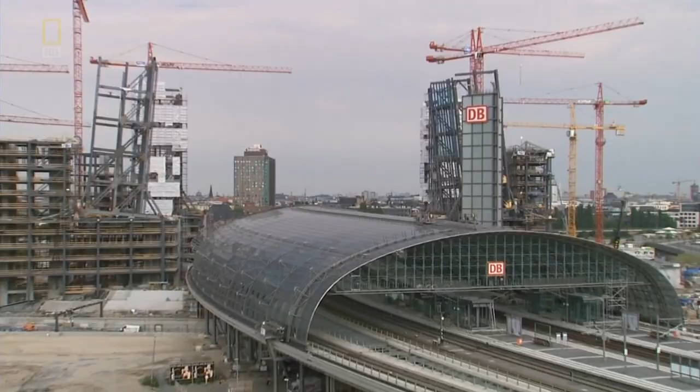Berlin, Germany. A construction team races to finish the largest train station in Europe before next summer's World Cup comes to town. To meet this deadline, 2 massive steel towers must be tipped over their new glass station in under 3 days. It's an engineering feat never before attempted. Can this team of engineers get this daring plan to work?

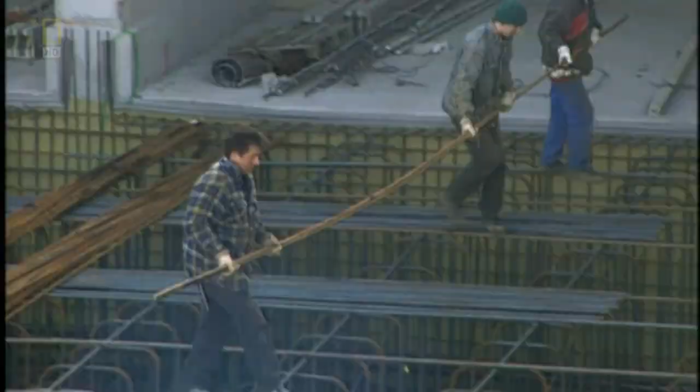In Germany, builders are racing to complete an architectural crown jewel. They've labored for over a decade, confronting one disaster after another. When finished, this will be the largest train station in Europe. 7 levels containing a staggering 180,000 square meters of space. Nearly as much space as the Empire State Building.

Even more amazing, 2 office buildings will straddle the station, both standing 12 stories tall, with 4-story high bridges suspended just above the glass and steel roof of the station. The price tag? Over 4 billion euros and counting. Financed by the Deutsche Bahn, the German rail company and the government, and designed by a world-famous architect, the project is intended as a bold statement. If it works, it will literally and figuratively reconnect East and West Germany, ushering in a new era of unification.

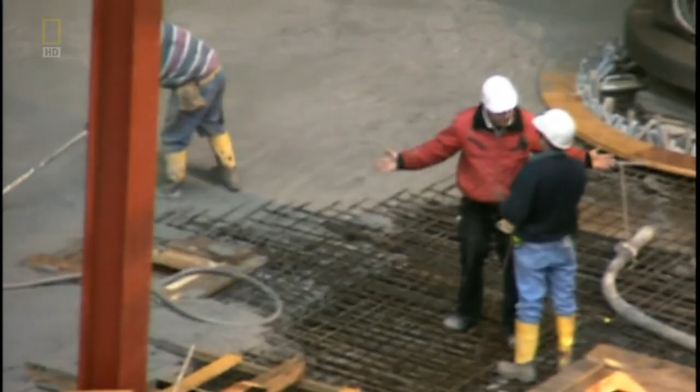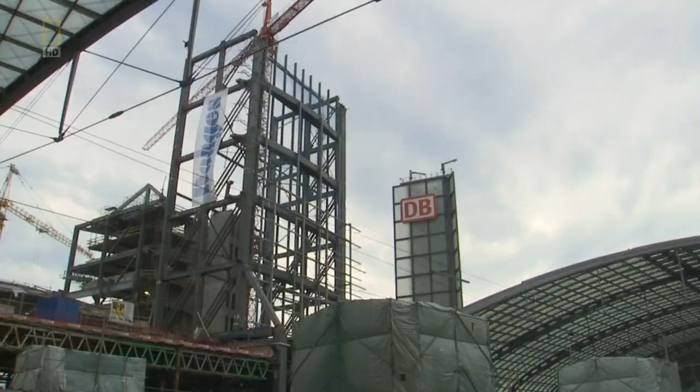But the project has faced terrible setbacks. It's years behind schedule and billions over budget. To make matters worse, the architect is suing the developers for cutting corners on his design. Soon, the project will be coming to a head. The builders are about to execute a move never before attempted in the history of construction. They will attempt to gently pivot these 2 massive halves into their final position, forming a steel bridge just 2 meters above the station roof.

It's a terribly risky scheme. If anything goes wrong and the bridge sections hit the glass roof below, the project would suffer unthinkable damage, and the cost would go up by more millions. Will Berlin's new central railway station ever be finished?

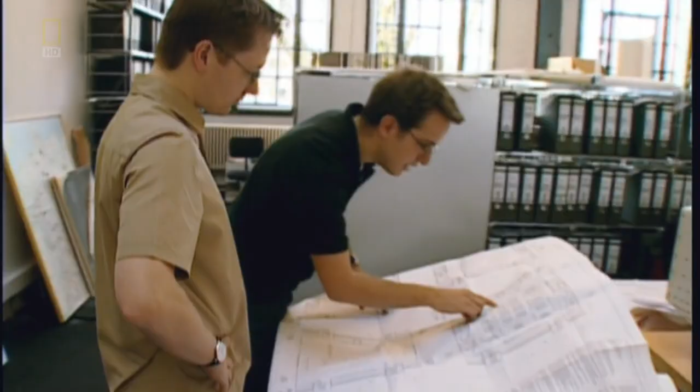Since the 1989 fall of the Berlin Wall, Germany's capital city has undergone a frenzy of rebuilding in an attempt to reclaim its historical place as the cultural and economic center of Europe. What better way to solidify that role, planners thought, than with a truly world-class rail station? As the centerpiece of a completely rebuilt transportation system, the station would not only relink East and West Germany, but all of Europe, by connecting Paris with Moscow and Stockholm with Vienna. Berlin, of course, would be at the center of it all.

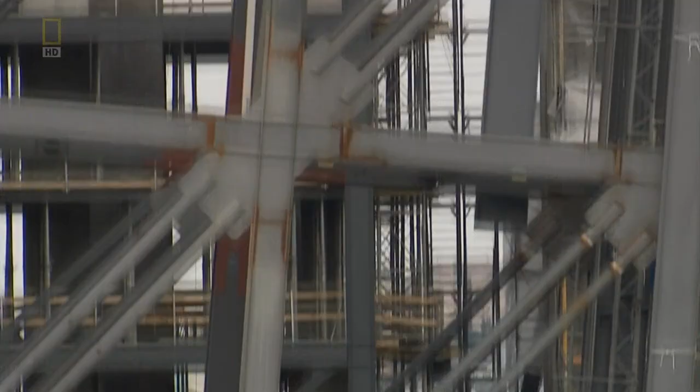But today, 5 years after its original scheduled completion date, the project is still under construction. And it's reached a critical moment. Down on the streets, crowds begin to form. They've come to watch an unfolding drama. A milestone event in the history of construction engineering. The fate of the entire project hinges on this step.

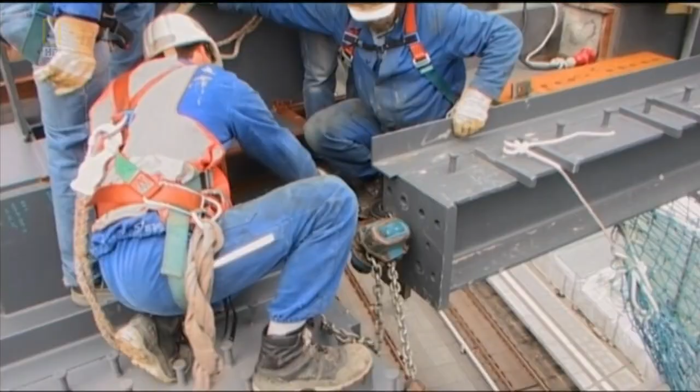Up in the air, a team of specialized engineers and workers are preparing to execute a dangerous maneuver. Scaling the steel like mountain climbers, workers make their final adjustments. Check and double-check hundreds of details. All eyes are now focused on a pair of huge steel bridge sections. When finished, they will form a bridge, 4 stories high, hovering just above the roof of the train station. The bridge will join the 2 sides of the office building and will itself contain thousands of meters of office space.

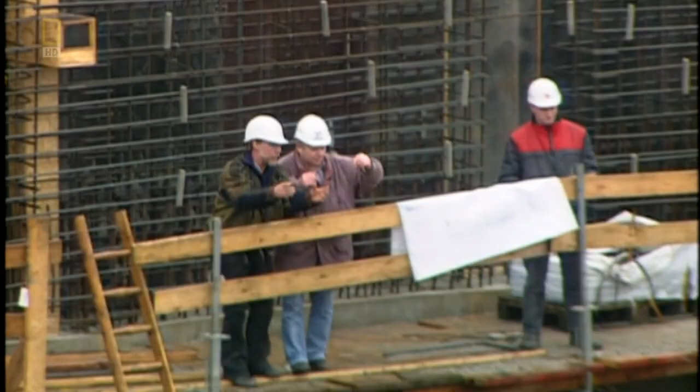Because building a working train station was the top priority for builders, the twin office towers would have to be built after trains were running through the nearly completed station. One of their original ideas called for building the bridge the usual way, starting at one side and building out horizontally over to the other. But engineers realized that building the bridges that way was too dangerous. Safety officials lay awake at night at the thought of cranes swinging these huge steel girders above their new glass-roof train station, packed with thousands of commuters. They'd be forced to shut down train services over 6 weeks until the bridge was done. But that would have brought Berlin to a standstill.

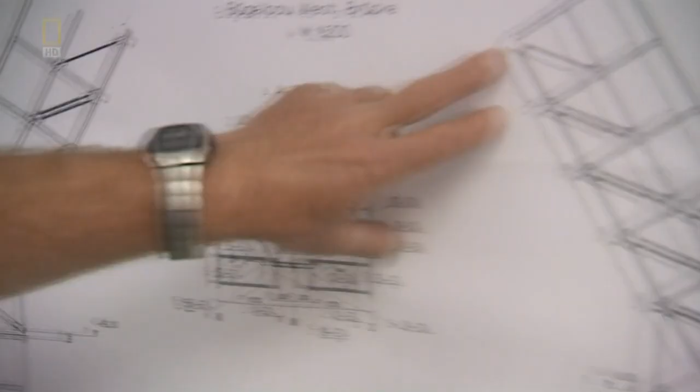So engineers came up with a remarkable solution. They would build the bridge in halves. Each half was built not out, but up. Now the 2 halves are ready to be lowered into place with cables. The tipping technique has never before been used in an urban setting. But now, there's no turning back.

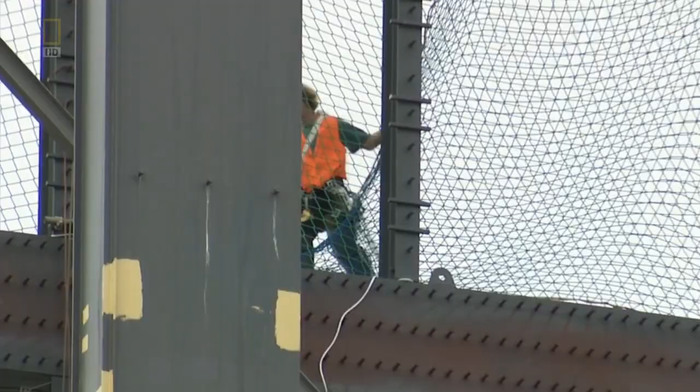Starting at 10 tonight, train services through the station will be halted. But only for the weekend. They'll have 54 short hours to get the bridge lowered and the sections attached. But each section weighs over 1,200 tons. If something goes horribly wrong, it could mean the total destruction of the station's spectacular new glass roof. It has one of the largest glass roofs in Europe.

Over 11,800 individual square panes. Each pane weighs almost 100 kilograms, bringing the total weight of the glass alone to 1.2 million kilograms. That's a lot of glass.

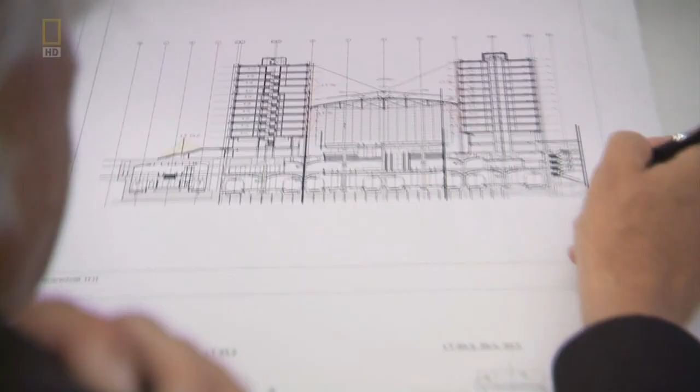World-famous architect Meinhard von Gerkan knew from the beginning that he wanted glass to play a prominent role in the station's design. The most important thing for a public building is to have the impression of daylight. You feel much better if you are part of the total environment, the natural environment.

As it happens, big glass structures are all the rage in Germany right now. When the Reichstag, the German parliament, was rebuilt in 1995, the government insisted on installing a glass dome on top to reflect the new German transparency. Glass has traditionally been a material of choice for train station designers, but it's always been expensive and tough to work with.

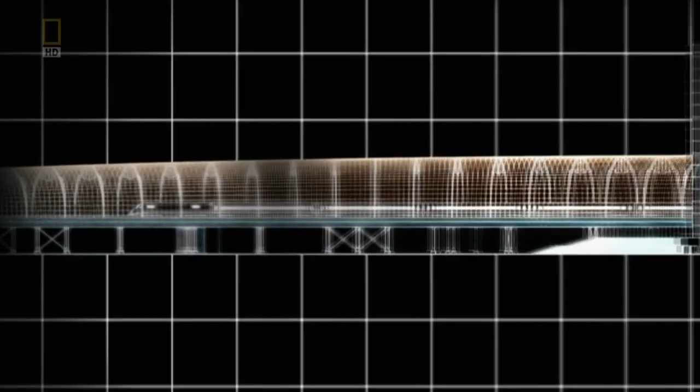Early train stations with glass also needed immense support structures of steel to hold up all that heavy glass. The result, in spite of the glass, not much natural light could get in. The stations were still pretty dark. Von Gerkan wanted to do better. His design called for a massive curving glass tube, 16 meters high, 60 meters wide, and over 400 meters long, to form a nearly transparent roof and walls for the main platform.

He needed to find a way to eliminate all that steel, to have the glass support itself, or at least appear that way. But a glass structure can be as dangerous as it is beautiful. In 2004, almost a year after its opening ceremony, a brand new glass terminal at Paris's de Gaulle airport suddenly collapsed, killing 4 people. Investigators pointed to both design flaws and construction defects.

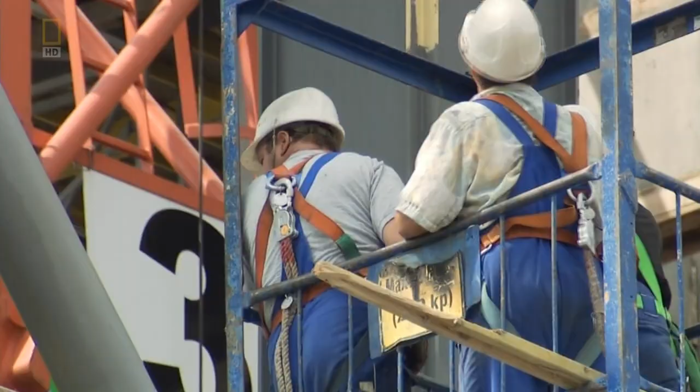Now, with just hours to go before the crew here in Berlin attempt one of the most unorthodox construction tricks in history, the possibility of disaster cannot be far from anyone's mind. It is the ultimate challenge for a project that has missed one deadline after another. Today, a new deadline looms, and the teams know they can't blow it.

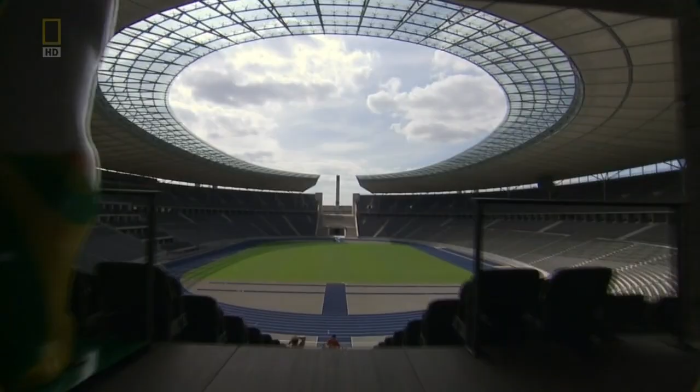Mid-next year, the World Cup football tournament will focus the world's attention on Germany, the most watched sporting event in the world with an audience of billions, more than even the Olympics. Millions of fans from across the globe will flood into Germany, with the final game here at Berlin's Olympic Stadium. City officials desperately want the global event to also serve as the station's inauguration.

Berlin officials expect up to 3 million football fans to descend on the city. They desperately need the station completed, because once the games begin, nearly 500,000 fans will use it every day. If the project is still under construction, it will be a huge embarrassment for the country in front of an international audience.

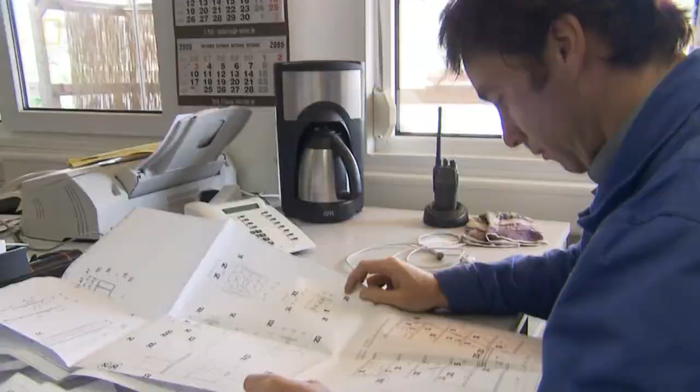All this pressure now sits squarely on the shoulders of the two men in charge of the operation. Olaf Severin will run the crew lowering the South Tower. Bernd Naujoks will lead the North Tower team. They go over the plans one last time. Years of preparation have led up to this weekend.

At 10 tonight, all train traffic through the station will be halted. Olaf and Bernd must complete the work by 4 a.m. Monday, the start of rush hour, when the train schedule must resume. If they're late, Berlin becomes one huge traffic jam. Between now and Monday, neither one of them plans to get much sleep.

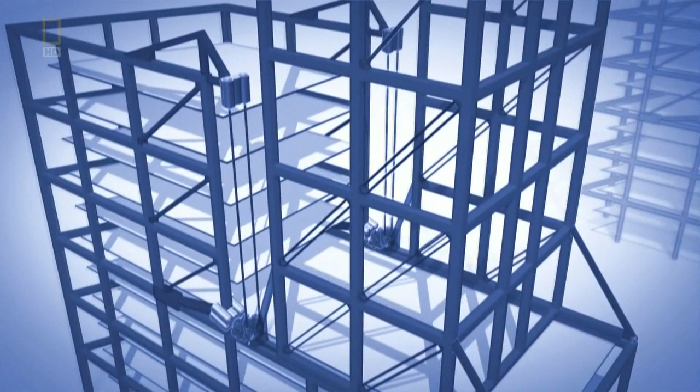On paper, the plan is simple. Each bridge section currently stands on its end. Both towers are fitted with 12 massive jacks, 4 on top and 8 on the bottom. To begin tipping the sections, the men will first activate the top jacks. These jacks pull up on a series of steel cables anchored to the tower, tipping the tower on a single pivoting hinge.

Once it reaches an angle of 15 degrees, it will start to fall. To keep it from crashing down, the bottom jacks are now activated. These jacks act as a brake, lowering the tower by slowly letting out a second set of cables, centimetre by centimetre. The two sets of jacks share the load until the bridge sections reach an angle of about 40 degrees. At that point, the bottom jacks take over completely for the rest of the ride.

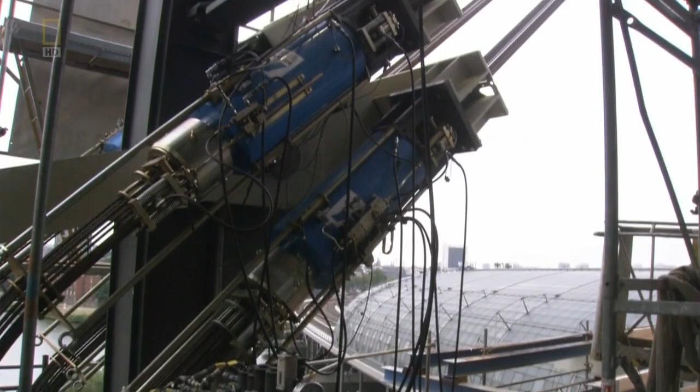A simple plan, but with years of experience, Olaf knows problems could spring from any direction. Snapped cables, misfiring hydraulics, high winds. So computers are on board to control the process. They can monitor the shifting weight, regulate the speed of the jacks, and shut down everything if they sense a problem.

Olaf and Bernd share final authority, and each of them knows that if they have to, they can override the computers. The two decide to make a bet on who will get to the bottom first.

One thing's for sure, Bernd. We will reach the bottom first. What? No. Let's bet a case of beer.

But before the starting horn can sound, final safety measures must be finished. Workers dangling 70 meters in the air attach nets to the bottoms of the bridge sections.

The nets are supposed to protect the nearly 12,000 glass panels of the station roof, in the event that something falls from one of the sections during the tilt. Glass has been used in train station roof construction for over a century, but early builders were limited by the expense and fragility of glass. So builders kept both the size and the quantity of the panes they used small.

Architect von Gerkan's design for the new Berlin station called for nearly 12,000 panels, each over a metre square. For such a vast quantity, project managers came here to the Guardian Flachglas factory just outside Berlin. Virtually all of the glass used in the station was manufactured here, using a modern method called the float process.

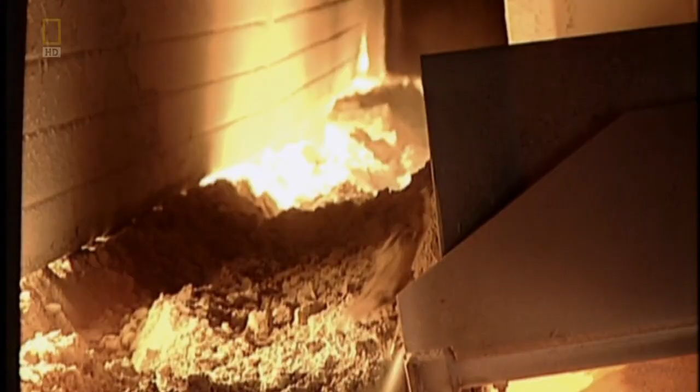Today's high-quality glass is made from a blend of raw materials, including silica, soda, and lime. These ingredients are combined with recycled glass and fed into a huge furnace. The furnace is heated to over 1500 degrees Celsius, hotter than volcanic lava. So hot, workers can only keep watch through tiny windows, wearing heat-resistant clothes and goggles.

The extreme heat inside the furnace melts the ingredients into a liquid glass. The glass spreads out over a layer of molten tin. Because the plane of contact between the two liquids is perfectly flat, the resulting glass will be virtually free of optical distortion. Next, the glass is slowly cooled in these 120-meter-long giant coolers.

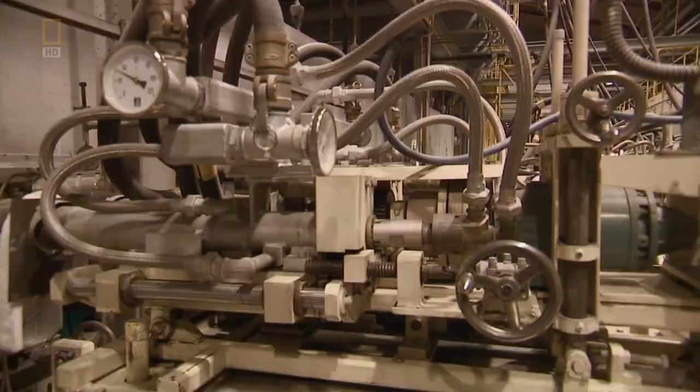This factory could theoretically produce glass sheets over a kilometer long, but they would be essentially impossible to ship. So each piece is then scored, cut to size, and trimmed. But the glass panels von Gerkan needed for the train station needed to not only be large, but also extra strong, capable of withstanding bad weather and the constant vibrations from trains.

So the glass for the station is tempered to make it twice as strong as normal window glass. As a final step, a layer of UV-absorbing material is fused with the glass. This step helps prevent the station from becoming the world's largest hothouse.

Back at the construction site, there are only 3 hours left until the big tip-over is supposed to begin. Team leaders Olaf and Bernd are anxiously awaiting the signal that train traffic through the station has been halted so that they can begin the delicate operation. But now there's a new worry. The skies over Berlin are looking ominous, and severe thunderstorms are forecast.

The two men know they must do everything they can to stay on schedule. The trains can only be stopped for 54 hours. But they can't put their men at unnecessary risk. If the conditions get too bad, they'll be forced to call off the procedure. As night falls, there's nothing to do but wait and hope that the storm blows over.

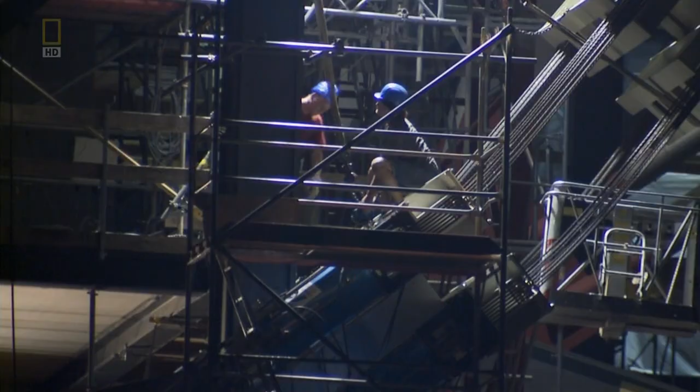10 p.m. at the construction site of the massive Berlin rail station, and lightning is lighting up the sky all round. Rain is coming down in sheets, but the wind seems to be holding, so engineers make the difficult decision to proceed. Lightning should not be a problem. The wind has started to increase, but our static calculations consider such wind loads.

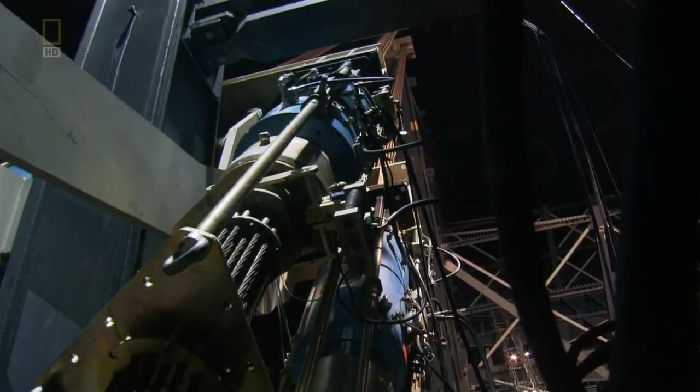After the last train leaves the station, the starting horn blares. Foreman Bernd gives the signal, and his North Tower team springs to action. The name of the game in this entire process is control. The computers, jacks and cables must keep the massive weight of the bridge sections under constant and complete control for the entire tilt. If they don't, the sections could jerk or start to sway, which could be disastrous.

Of course, gravity will be doing most of the work. All the machinery and all the men are here simply to keep gravity from working too fast. The scariest point will be the moment when the center of gravity shifts on the bridge sections. At that moment, the 12 jacks and nearly 400 cables will be pushed to their limit as they carefully lower the 1,250-ton weight of each section over the station. If the team can get past that changeover point smoothly, the rest of the ride down should be easy.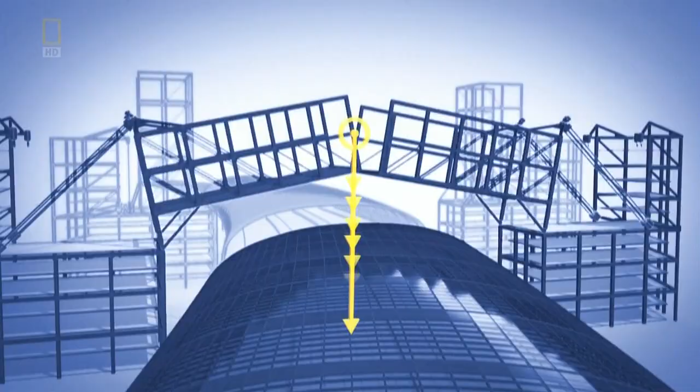The operation is the first time in construction history that two massive towers have been intentionally tipped over so much glass. It's taken months to place the thousands of glass panels. Each panel sits inside a perfectly sized steel square frame. This interlocking steel framing matrix is a crucial element of the design because the steel itself is so thin, it almost looks like the glass is supporting itself.

Architect von Gerkan wanted the station flooded with light, so he needed to find a way to hold up the glass with as unobtrusive a support structure as possible. And he could not sacrifice safety. The structure needed to hold firm against constant vibration from the trains rumbling through below. Hundreds every day.

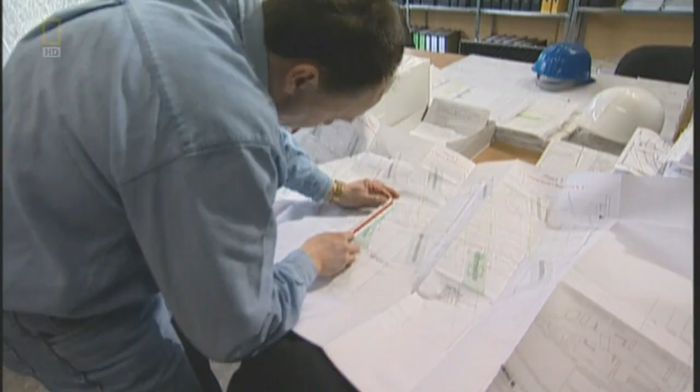Von Gerkan also wanted to avoid cluttering up the interior of the station with traditional support posts. So project engineers came up with an ingenious solution. An elaborate skeleton of external supports. This steel anchor joint weighs 4 tons, nearly as much as 2 SUVs.

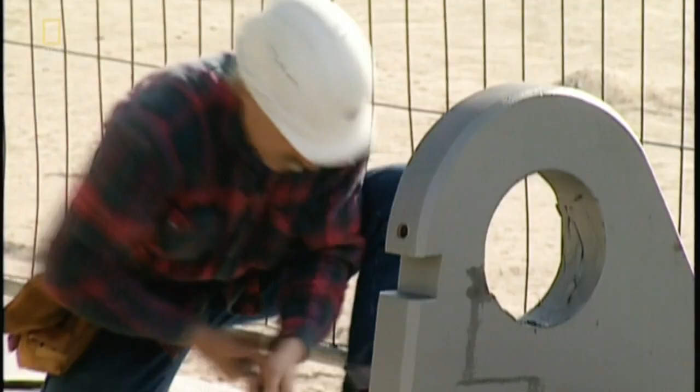It's one of 46 identical anchors that, when placed and bolted, will serve as the primary support for the entire glass and steel lattice above. Each joint will be capable of holding almost 200 tons. Placement is critical. A surveyor carefully guides the team. Once the anchor joint is secure, cranes lower one end of an 11-ton end section of one of the station's arching main support beams.

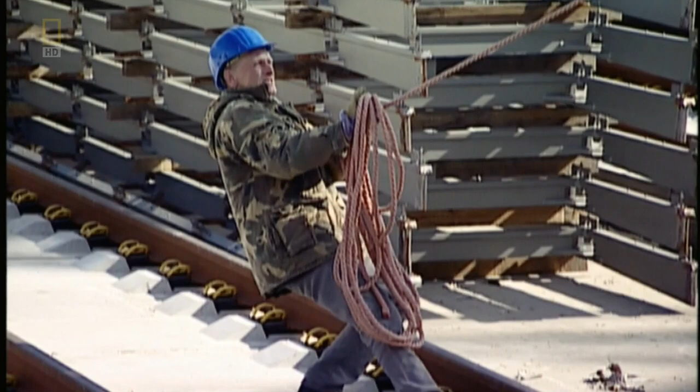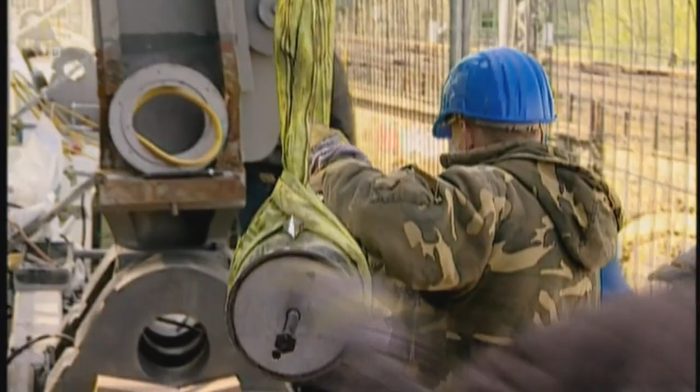It's not unlike the world's biggest door hinge. First, the crew carefully aligns the holes. Then a 300-kilogram steel locking pin is slid through the holes. This hinged joint will let the huge beam sections rotate as needed during construction. They will also let the entire structure expand and contract without creating wear and tear on the joints.

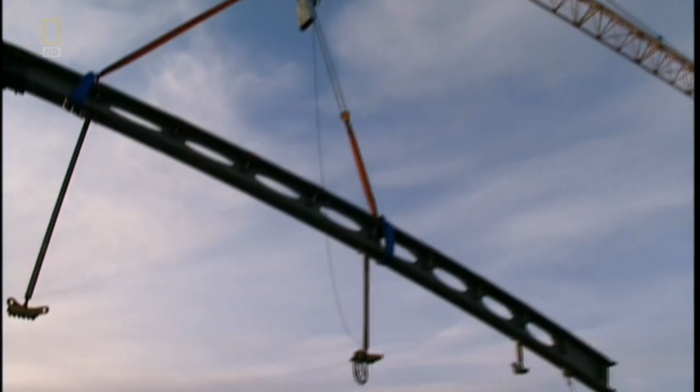Once this end of the beam is locked into its anchor, the other end can be placed into an identical facing anchor on the other side of the station. Each complete beam is made up of 4 interlocking sections. The steel and glass latticework hang between these mammoth support beams.

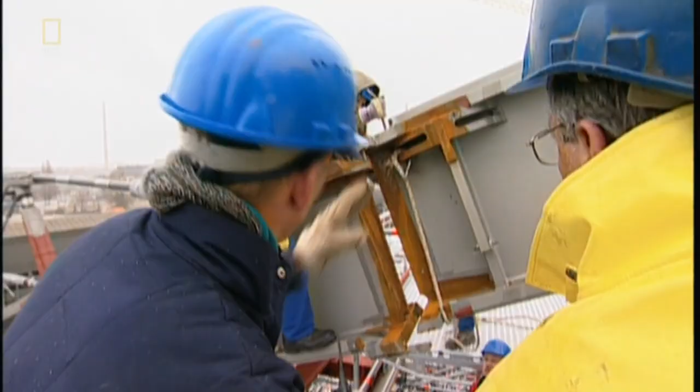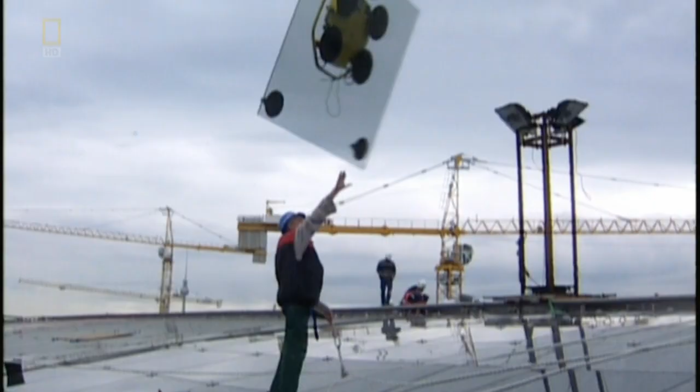After the last beams of the steel support arches are placed and welded, it's time to install the glass. Cranes specially fitted with suction cups gently lift one pane at a time to the crew. This part of the job requires calm hands, a steady nerve, and a delicate touch.

Working 16 meters above the tracks, workers must stretch to receive the glass, and stretch again while they dangle over the open steel frames. A spritz of glue, and the pane pops in. It took the crew working day and night for 4 months to install the glass to this point.

Today, only a 9 square meter section remains to be glassed. And while it's been all sorts of fun, nobody here relishes the thought of having to repeat this process. And that's just what they'd have to do if this station roof winds up getting smashed to bits by an out-of-control bridge section.

Back at the tip-over, workers wait for the signal to start. Bernd calls from the control room. They flip the switch. The huge jacks spring to life, and the massive towers begin their slow descent, 6 meters an hour.

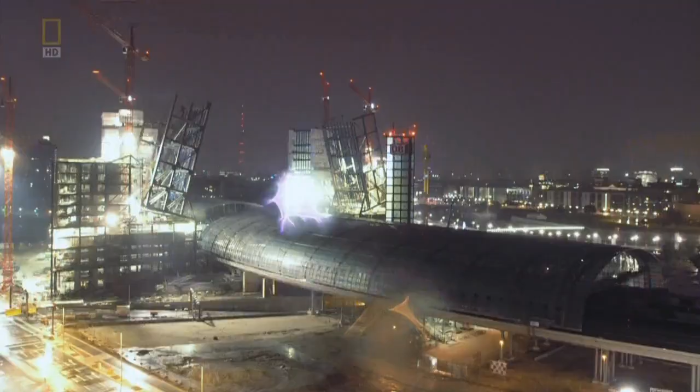As rain pelts the station, and all train traffic through the station remains stopped, workers check and recheck the tower's progress. Since the movement is almost imperceptibly slow, a simple ruler and bubble level provide assurance that the huge sections are indeed moving at all. Bernd's North Tower takes a slight lead.

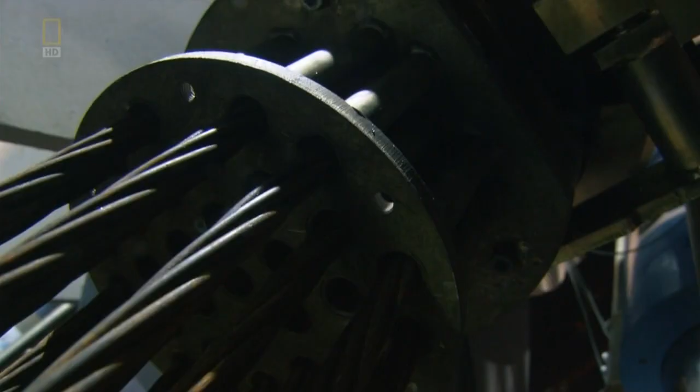One of their main concerns, the cables. If a cable binds or gets stuck for any reason while going through the jacks, it could cause the steel to jerk and sway. So workers armed with lubricant will keep that cable well oiled all night. Their crazy plan seems to be working.

Then suddenly, less than 2 hours into tilting, a problem erupts for Bernd's North team. The electronic signal coming from one of the jacks suddenly stops working. Without a signal, the emergency system kicks in. Tipping on the North Tower is automatically halted. Now it's a race against the clock and the weather.

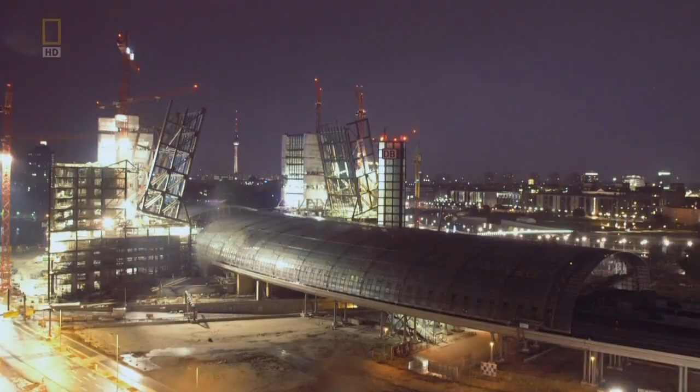3 hours ago, tip-over came to a sudden halt when communication between one of the jacks and the control room was lost. When working, the signal allows the computers to control the tower's every movement. Technicians believe the heavy rain shorted the line. It could take hours to fix.

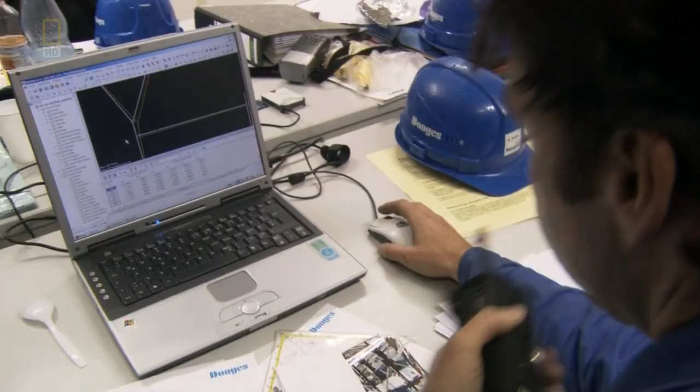Back in the office, team leader Bernd Naujoks makes a bold decision. With so much on the line and the clock ticking, he decides they can't wait for repairs. He tells his team to fire up the jacks once again.

Without the precise monitoring of the computers, engineers must monitor every centimeter of the tip-over manually, with surveying tools and levels. One more job for an already overtaxed crew. Even the slightest miscalculation could spell disaster, but it's a risk Bernd feels he must take. Just another crisis for a construction project that has been plagued with problems.

From the beginning, one of their biggest problems was the location. To most people, these scenes are reminiscent of Venice. But this is Berlin. The city is built around 2 main rivers and countless smaller waterways. The water adds charm to Berlin, but it adds all sorts of complications to builders' plans.

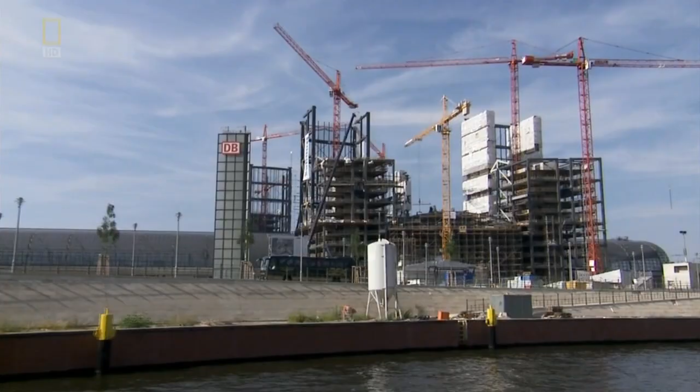When you build a billion-euro mega train station, it's all about location, location, location. The chosen location for the new station had once been the site of a majestic train station called the Lehrter Bahnhof. But that station suffered irreparable bomb damage during World War II and was then demolished in 1959.

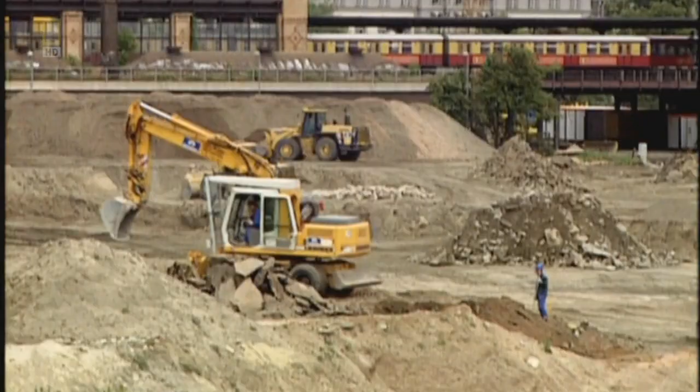In the early 1990s, when planners first came here, only a small local train terminal stood on the grounds. The land for the new station was vast and centrally located, right in the middle of Berlin, the perfect spot. But big problems popped out at engineers immediately.

The ground beneath the site, along the bank of the Spree River, was mainly composed of fine sand. While the site was adequate for this small terminal, the new station would be several times larger. Nothing that large could ever be built on top of this sandy site, and that wasn't the only problem. The ground was also extremely saturated with water, making the construction area even less stable.

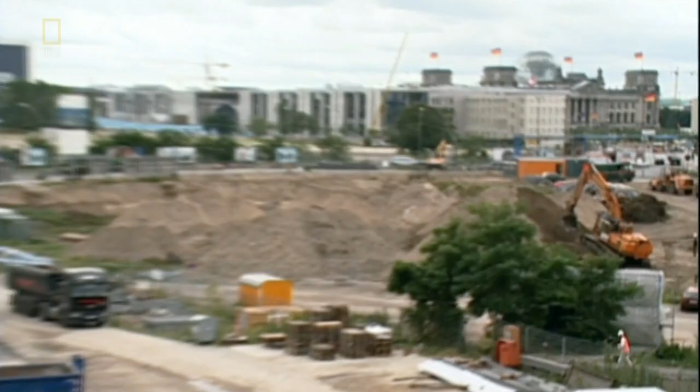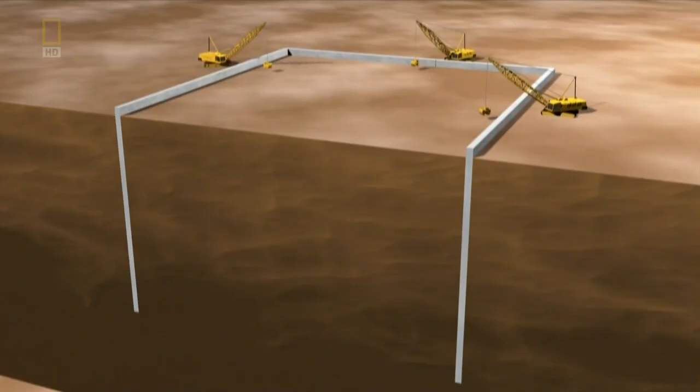Engineers needed to not only build a solid foundation, the size of 11 football fields across this sandy area, but also construct the 2 lower floors of the station below the groundwater level. In 1996, construction began on the 90,000 square meter foundation and the lower station floors. To do this, workers first boxed in the massive area with waterproof walls. The 1.5 meter thick concrete walls extended down 25 meters below the surface.

Excavators then shoveled out the earth between the walls. As they removed the dirt, the groundwater filled in. Once they excavated to a depth of 20 meters, they poured a 1.5 meter thick concrete floor under the water. Divers then reinforced the concrete corners, making a watertight box.

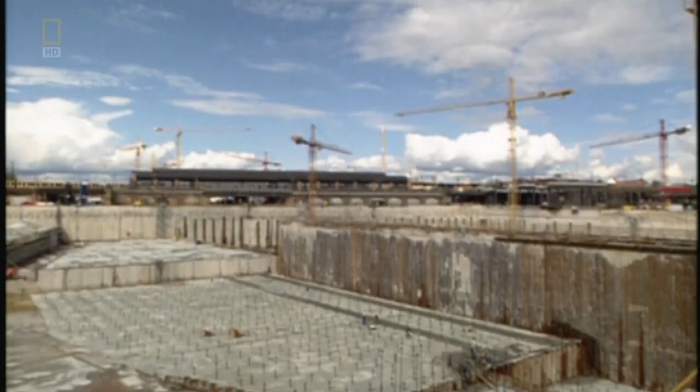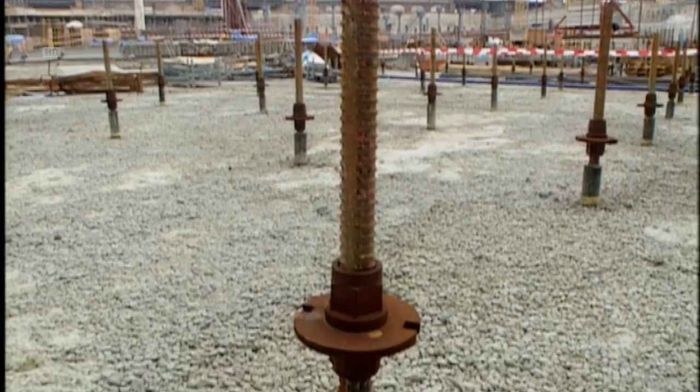The water left in the box was pumped out, but without the water in the box to equalize the pressure, the water below these concrete floors would exert a tremendous force on the new foundation, 20 tons per square meter. This pressure would cause the floors to pop like a champagne cork. To prevent this, the floor was held down by a series of long steel piles, almost 30 meters long. With these huge spikes holding the foundation firmly in place, the rest of the station could be built.

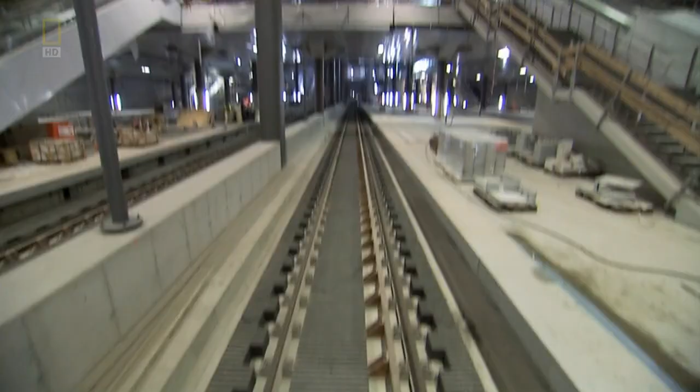Bridges and support beams could be erected, and tracks laid into position. But a big question still remained. Would it hold up the trains? Engineers had to be certain their glass-domed station sitting on a bed of water and sand could hold up under constant pounding. A train weighs about 800 tons, or as much as 300 pickup trucks, running over the bridges and supports over 50 times an hour.

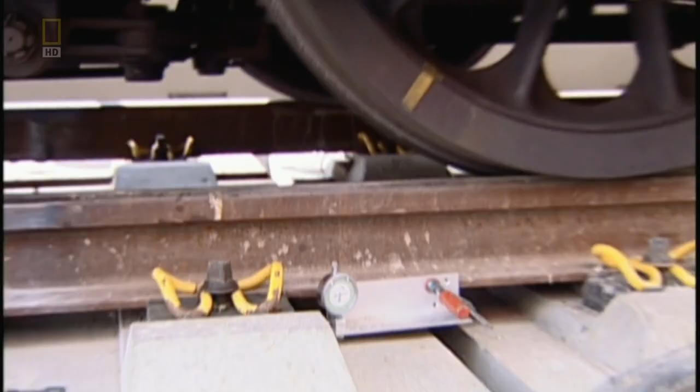So the station was put through a rigorous battery of tests. Motion sensors were attached in key areas throughout the station, on the bridges, the supports, and along the tracks. Then they called in the big rigs. Trains weighed down with over 40 tons of concrete slabs, running over the tracks, over and over, and over again. Measurements were taken all along the track and fed into a master computer.

The station was designed to be flexible, but if it shifted by more than 5 millimeters, they would need to shut down until it could be reinforced. When the final readings were measured, the station held up. It was ready for trains. In July 2002, the media came out in force to watch the first train to ever run through here. But no one was calling this station done.

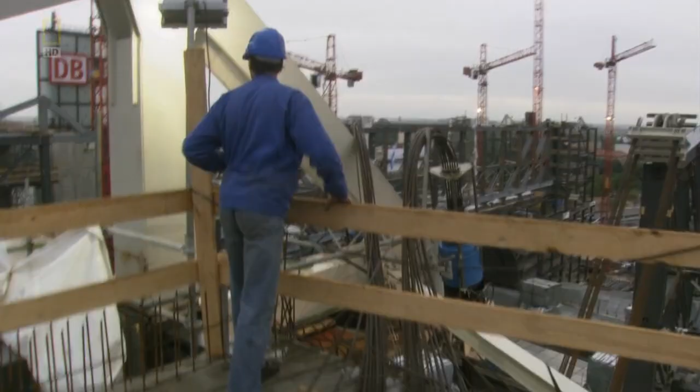Today, the pressure to get it done sits on foreman Bernd Naujoks. Since he made the daring decision to restart the tipping of the North Tower, without the computer signal from the jacks, his tower is once again slowly lurching forward, tipping 6 meters an hour. Bernd's big gamble seems to be paying off. He only hopes it stays that way. It's been a long, sleepless night for workers attempting to tip 2 megatowers at Berlin's Central Station. And no one is sleeping now.

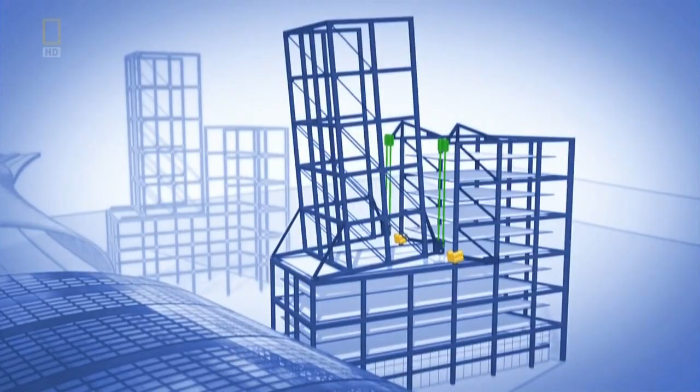Foreman Olaf Severin's South Tower is about to reach the scariest stage of tip-over, when it reaches a 30-degree angle. At that moment, the center of gravity starts to shift on the bridge sections, slowly switching the burden of the tower's weight, all 1.3 million kilograms, over from the upper jacks to the lower jacks and cables. The jacks must maintain equal tension on either side of the tower. The delicate balancing act continues until about 40 degrees, when the upper jacks will no longer be assisting the tip-over. If it isn't executed perfectly, this tower could start to swing out of control.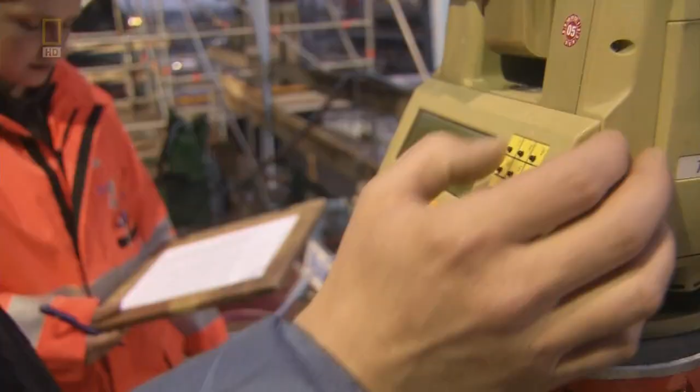As the South Tower reaches the critical angle, a team of surveyors starts computing some of the most important data of their lives. Bleary-eyed from lack of sleep, they work quickly, checking their predicted calculations against what they're actually seeing. After checking everything, the tower's angles are all within the acceptable range. They believe the lower jacks and cables are ready to hold the entire tower.

Olaf stops the tipping. Over 1,200 tons of steel and concrete dangle above, held in place by nearly 400 steel cables. The 4 upper jacks are no longer needed, so 3 workers crawl up to take them apart and remove their cables.

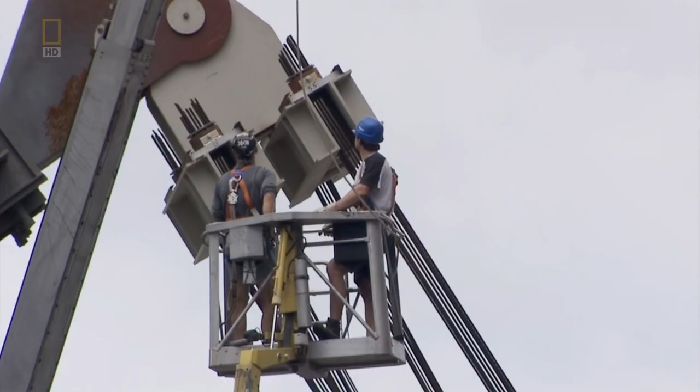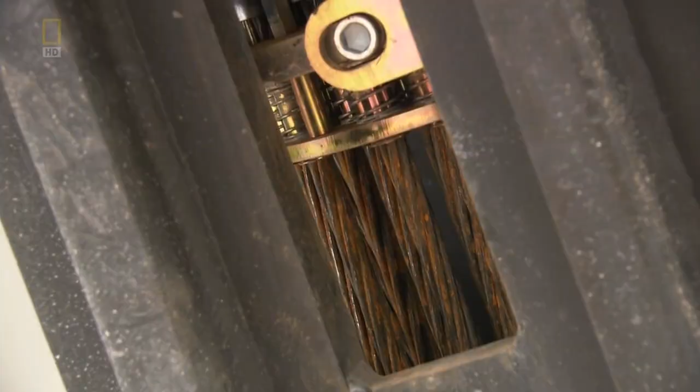Now just the bottom jacks remain to lower the massive tower, weighing more than 6 jumbo jets. The starting command is given. Pumps hiss, jacks groan. 250 steel cables strain from holding up all that weight. The surveyors and engineers keep vigilant watch. But the cables hold. It should be all downhill from here.

Down on the street, a crowd has formed to watch the show. This guy thinks they're doing it all wrong. On this side, the ropes are slightly loose. I don't know if everything's been thought through.

12 stories above, the North Tower just passed through the critical switchover stage unscathed. Since making the daring decision to tip without computer monitoring, Bernd's team has managed to make up some lost time. If they keep at this pace, they'll finish ahead of their deadline, but still behind the South Tower.

I have to get going and buy the beer. I'm afraid I'm having difficulties catching up with Olaf.

But they'll need to settle their bet later, because they're about to reach the final tip-over stage, when the 2 towers are brought together, forming a steel bridge. Like giant puzzle pieces, the North Tower was built to mount into the South Tower. For that to happen, both 44-meter-long towers must come together at exactly 83 degrees and then be lowered simultaneously before finally landing only 10 centimeters apart.

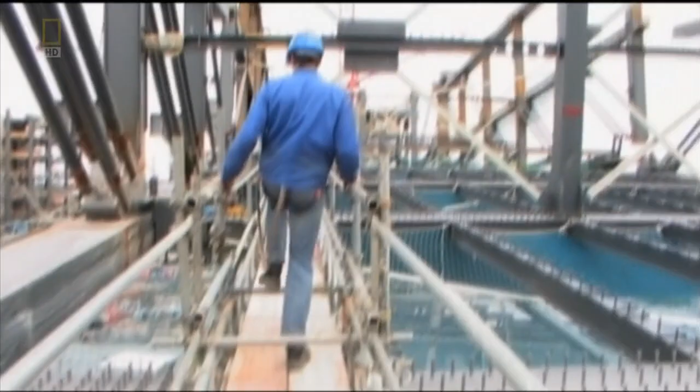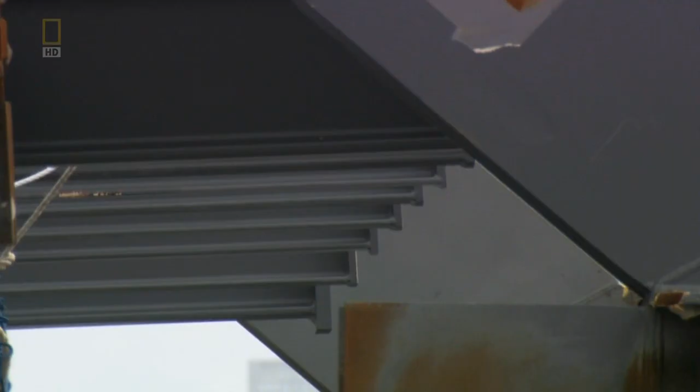They are ready for the final stage. With precious time already lost, the two teams get right to work. Bernd climbs over unfinished beams, more than 40 meters out to the edge of his tower. From this precarious position, he can coordinate the movements between the towers. He gives the signal, and the towers are on their way down, only 5 millimeters at a time. A little up, a little bit over, a little down.

Bernd checks to see if they're level. Voila! The lowering is now complete. Exactly as planned, only a 10-centimeter gap remains between the towers.

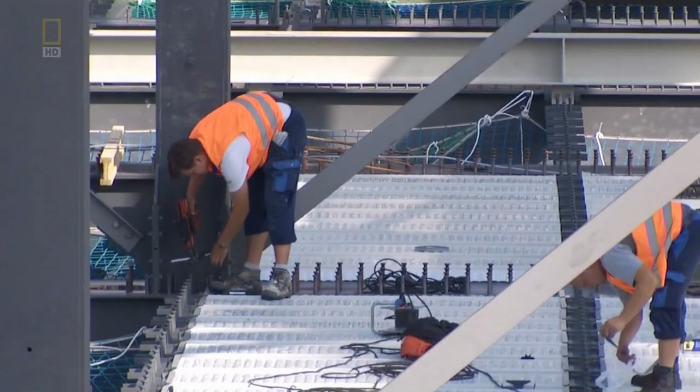To pull them together, hydraulic pumps, each pulling 100 tons, tow the two sides in tight, forming a bridge unifying north with south. But now is not the time to admire their handiwork. Before Berlin's trains can run through this station safely, there is still a lot of work to do. Workers must bolt the bridge sections together, make hundreds of welds, and lay over 1,500 square meters of flooring. Hours behind schedule, they know all this work will take them right down to the wire.

With the tipping stage complete, the foremen finally find a moment to relax. Bernd's not empty-handed. Super job. He knows when he's been beaten.

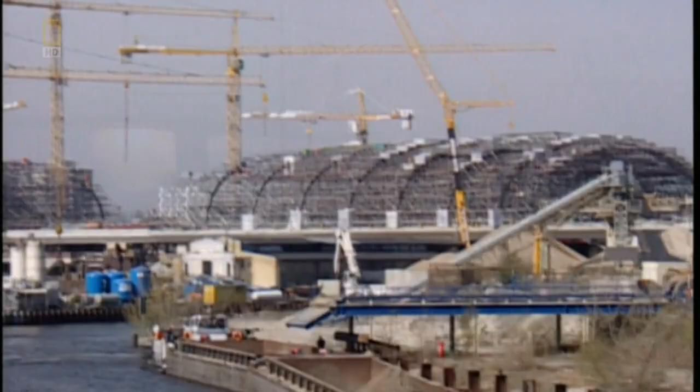But not everyone is celebrating, especially the architect. In 2002, already years behind schedule, the Deutsche Bahn, the German rail company that owns the station, decided to take drastic measures to meet their World Cup deadline. They decided to alter some features of the design. Over the architect's objections, they made two major changes.

The first was to the station's most noticeable feature, the glass roof. Von Gerkan's design had a 430-meter-long roof, long enough to cover the longest trains. The glass and supports were manufactured to cover the entire length, but before they were installed, the glass canopy was shortened, ending it 100 meters short.

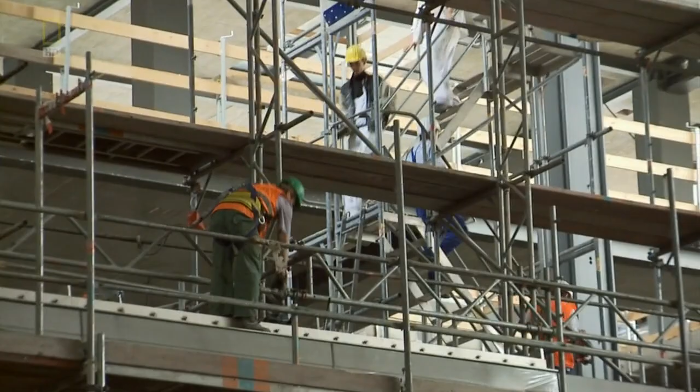But perhaps the biggest change is in the lower subway terminal, where light cascading down from the upper levels was supposed to reflect off a massive cathedral ceiling made of metal, casting natural light 5 stories beneath the ground. Instead, the great cathedral was covered with a drop ceiling. Like in a supermarket. Without any details, without any expression, without any charisma.

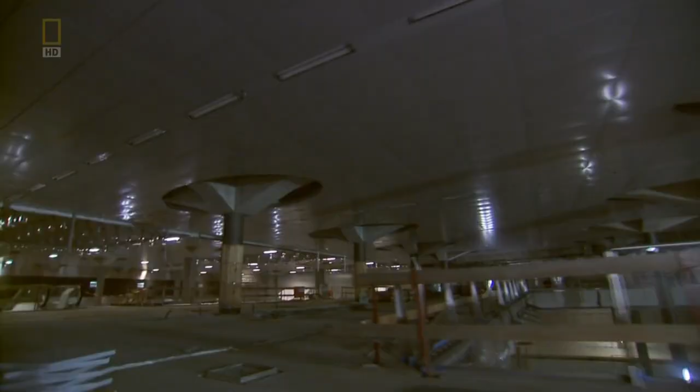The changes have saved the project time and money. That's how it is in big projects. You have to decide, do I want to meet my requirements, my time schedule, or do I want to finish every small piece of it?

But for the visionary architect von Gerkan, there are no small pieces of his masterpiece. I must say it was the biggest loss I ever had in my professional work. I, as architect, have built so many buildings, more than 200. Nowhere have things happened like this. Von Gerkan is so outraged he has now brought the case to court, hoping his vision may one day be realized, even if it has to happen after the station is built.

Out on the bridge, sparks bounce off the glass station as the welders kick it into high gear. This weekend's deadline is approaching fast. The crew works late into the night, until finally, after more than 2 days of heroic engineering, the last weld is made. And once again, the trains start coming through the station.

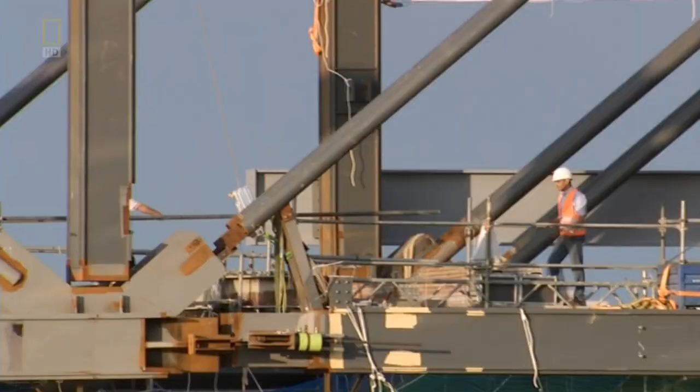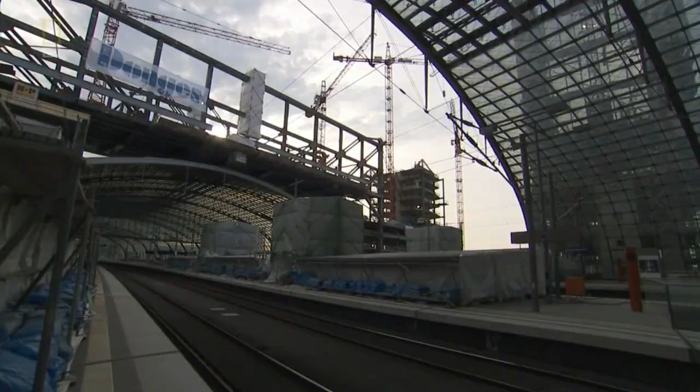The impossible feat of building a bridge by lowering 2 towers has been a tremendous success. But this crew know they'll only get 1 day off, because in less than 10 months, millions of World Cup football fans must travel through this station. So Tuesday morning, they start planning the tip-over of the second office tower. It is a race to the finish. Glass roof, tunnels, tracks, office towers, and even the landscaping. If they are successful, this mega train station will claim its rightful throne as Europe's largest, transforming modern Berlin into the center of Europe.